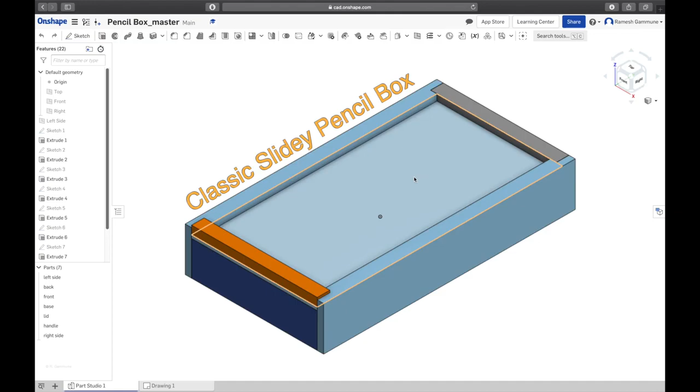It's a bit more advanced than the ones we did before, but it's still fairly simple. You're going to learn two key new functions in this. The first one is how to create an offset plane.

As you can see, that plane's not in the origin. The next one is how to mirror a part. So we've made this once and we mirrored it along the origin. That's the main difference, and they're the two key things you're going to learn in this tutorial.

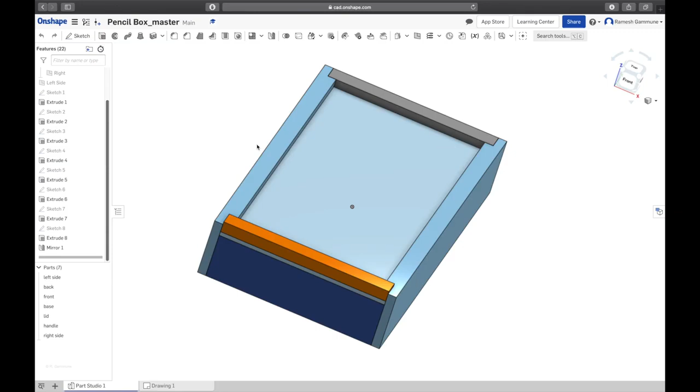Also, you're going to learn how to add new parts, because before we've just been adding features to existing parts. You will also learn how to do a more complex set of drawings.

As you can see here, this is what we are going to end up with. It's actually going to have two pages. Page 1 is a complete pencil box. Then page 2 is a part breakdown.

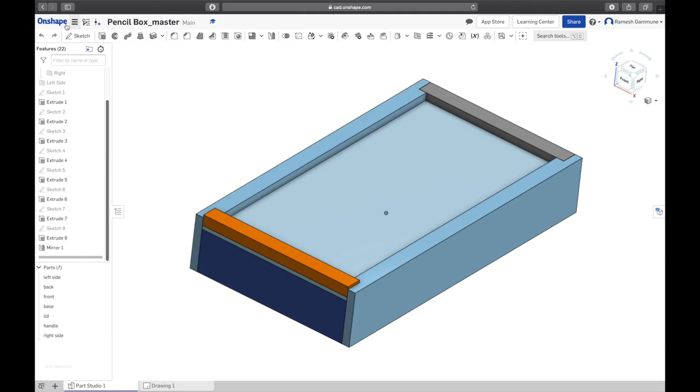Right, so let's get on with it. First thing I'm going to do, go back to my Onshape thing. I'm in a different folder. As you can see, I'm in my Onshape tutorials pencil box folder now. I'm going to go ahead and create a new document. I'm going to title this pencil box.

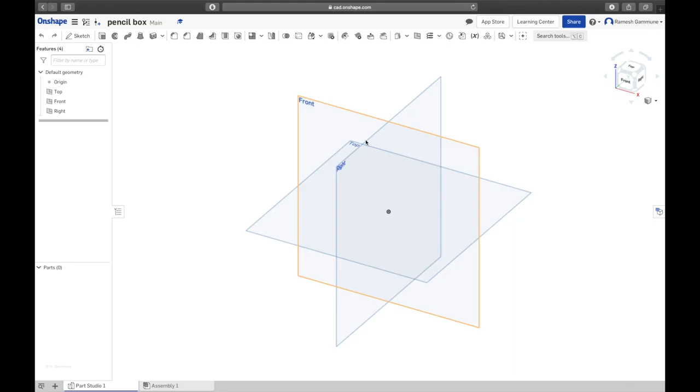Hit OK, give it some time. And we're here. Okay, so the first thing we're going to do is we're going to start by making this left side, just that one. We're only going to make one. At the end, we're going to mirror it.

So if you could just imagine that this pencil box is centered around the origin here. The origin is right in the middle. So we got our top plane that we're looking down on, our front plane, and our right plane.

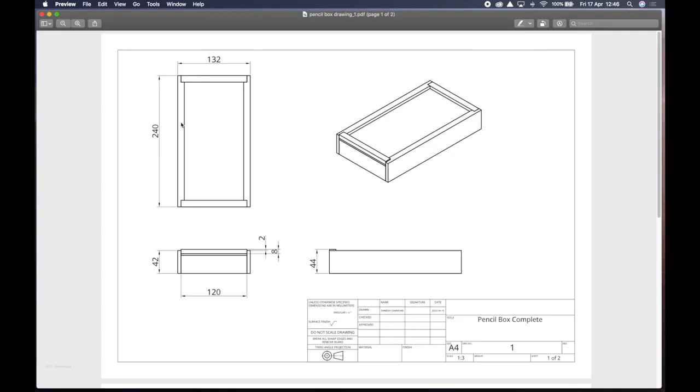So the first thing we have to do is create a new plane offset from the right plane. We spoke about offset sketches, so now we're going to talk about offsetting a plane. Halfway of 132, which is 66 millimeters. So we're going to offset one plane off the right plane by 66 mil and create this part on there. Okay, let's get on with that now.

So for this, I'm not going to need the front plane, I'm going to hide that. I'm not going to need the top plane, I'm going to hide that. I'm only going to need the right plane. And we're going to keep the origin because remember we like to anchor our initial sketches around the origin.

So here's what we do. We're going to go up here to our features buttons, and right here next to that helix, you're going to see a button called plane. So click the plane. And we're going to base this new plane, plane 1, off our right plane.

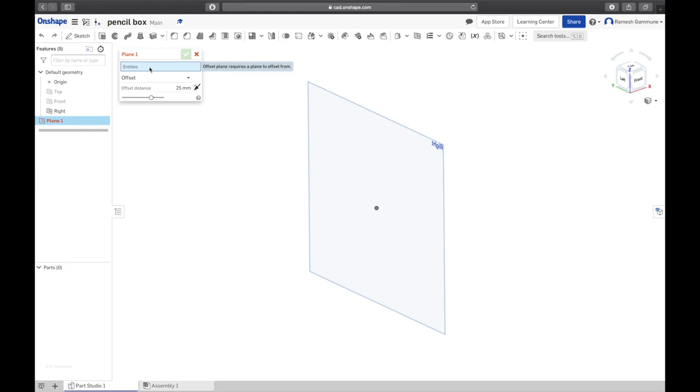Okay, so first thing you have to do is select a plane to offset it off. Now, you can offset planes off faces or planes, but we don't have any faces to do that yet, so we're going to offset it off this right plane. I'm going to click the right plane, and you can see that it is going towards the inside, towards the origin. We want it to go to the left side of the right plane, so we're going to click this button, opposite direction, and we have to type in 66, which is half of 132. 66, enter. There we go.

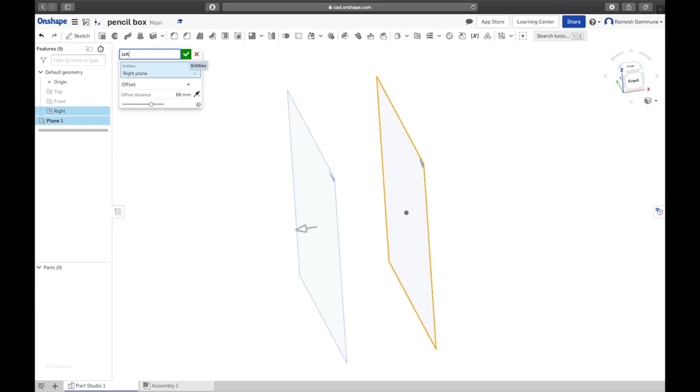And just to get used to good practices, I'm going to change the plane name as well. I'm going to change this to left plane, left offset. There we go, done. Now we don't need the right plane anymore, or for now, so we're going to hide that. So we're going to keep the origin. And we're going to start drawing this side.

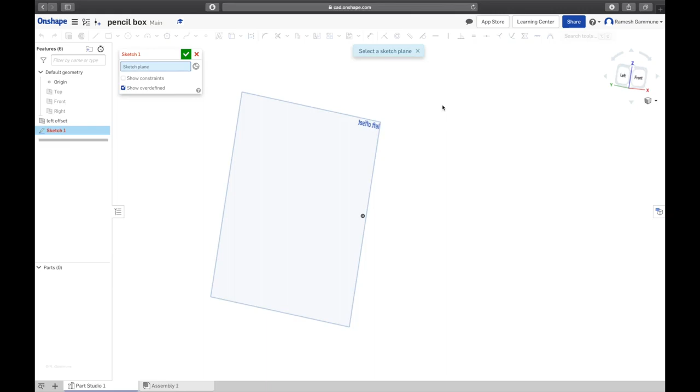And we're going to look at this now, because that gives us what we need to know. So back to Onshape, we're going to open a sketch as usual. I'm going to do this a bit fast now because you've had practice. Select in the sketch plane. Select the new sketch plane, which is our left offset. Right click. View normal to sketch plane.

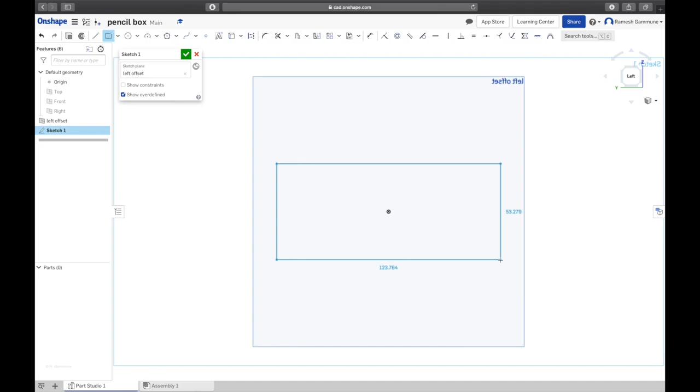Here we go. Going to start off with the center point rectangle. Base it off our center. And just as before, just draw a random one. Hit escape. And we have to dimension it to 240 by 42. So dimension button. Start using shortcuts now. So dimension is D. There we go.

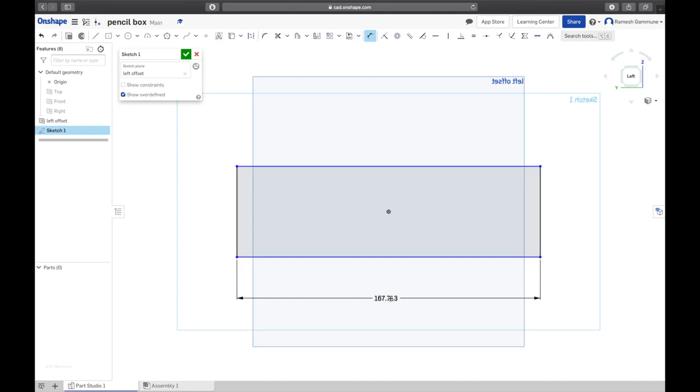Down was 240. Enter. We're still in dimension. Do this up, and that's 42. Enter, right? Just double check, 42, 240, accept it, right?

First step done. Next thing, we got to extrude it at 12 mil. Now remember, we placed that plane to the left side of the right plane, so we have to extrude it towards the origin, right? Not out. If we do that, our box is going to end up being 12 millimeters times 2, because it's going to happen on both sides. It's going to be 24 millimeters wider than we initially intended it to be. So we're going to extrude this towards the origin.

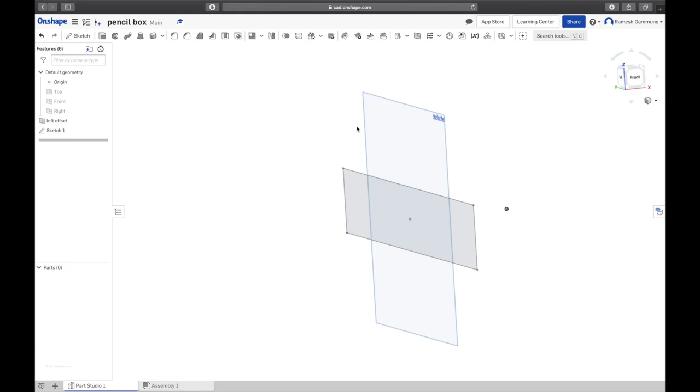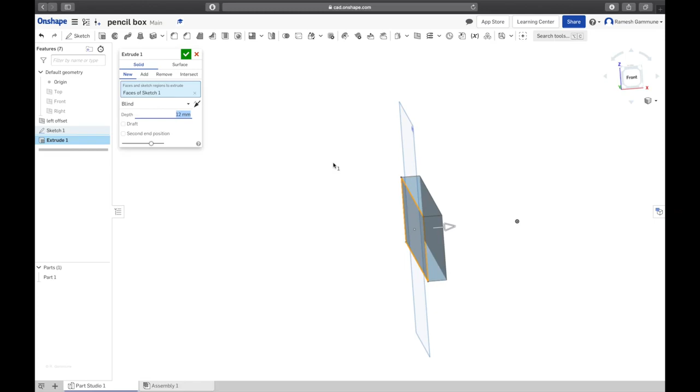Start off by doing that. Right, so back to this. Extrude. Click. Instead of clicking it over here, I'm going to click it from here, just because something different. And you can see automatically it goes towards the origin anyway. And change our depth to 12. Enter. Looks about right. Looks perfect, actually. And accept it.

Cool, that's done. Now, still keep the origin showing, but we can hide the left offset, right? You can actually right-click on that and go to hide left offset plane and do it that way. And as you can see, it's the same function. Done. One step. The next thing we have to do is cut out these grooves.

As you can see, we are going to do these side rebates at the very end. We are going to cut out these long grooves first. So we're going to base it off this side. And you can see it's 6 mil down from the edge, 3 mil wide, because that's the width of the saw blade that we use, and that's the actual thickness of the plywood piece that goes in here for our lid. And the bottom one is 6 mil deep and 3 mil wide, but it's not offset from the bottom. It's just essentially a long rebate. Let's go do that. And here we go.

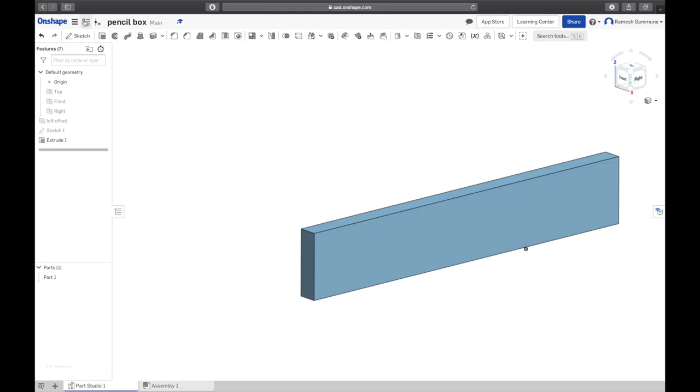Right, back to sketch. Make sure you're doing it the right way. The origin is on the right side of the piece. Sketch plane, we're going to select this. Make sure it's the correct one. Right click, view normal to sketch plane.

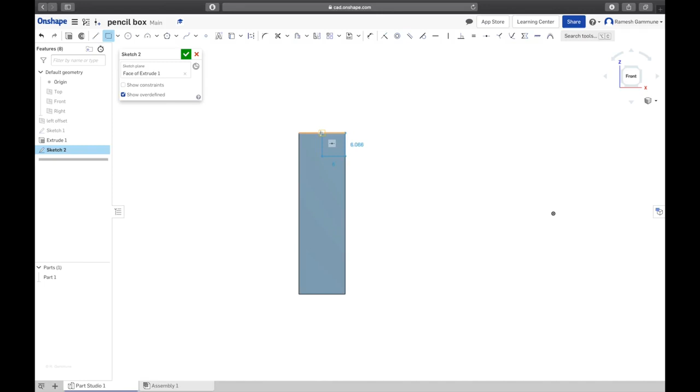Okay, for the top one, we are going to use the normal corner rectangle. Just draw a random rectangle, but make sure that you don't accidentally lock into the midpoint of that top line, right? Yes, ultimately it is going to be 6 mil, and that's half of 12, but I just want you to do it a bit, just to get used to adding correct dimensions as well.

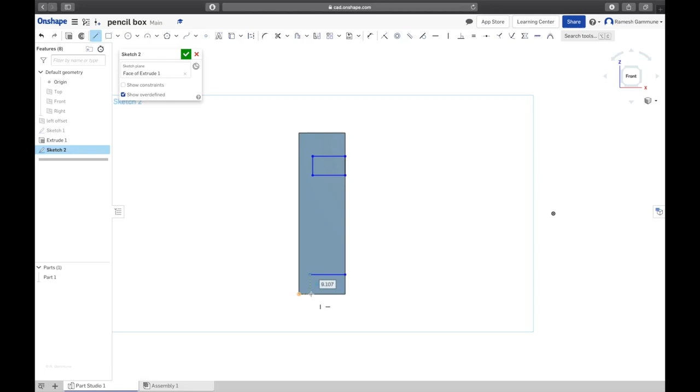Okay, that's done. Escape. The bottom one, we're going to use the line tool, or L, right? Clicked it, same deal, just a random size. And you'd notice that once you click and let go, the tool is still active, just like the rectangle we learned in the last videos. And click over there, hit escape.

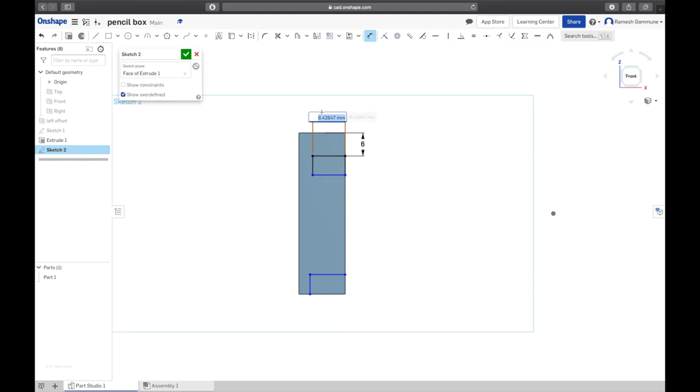Now let's dimension them, right? So back D, top edge to here. We said that was 6 mil. Enter depth, 6 mil. Forgot to hit enter then. Right, so if that happens, just while you're still in the dimension tool, double click that and you can edit it. Enter. All right.

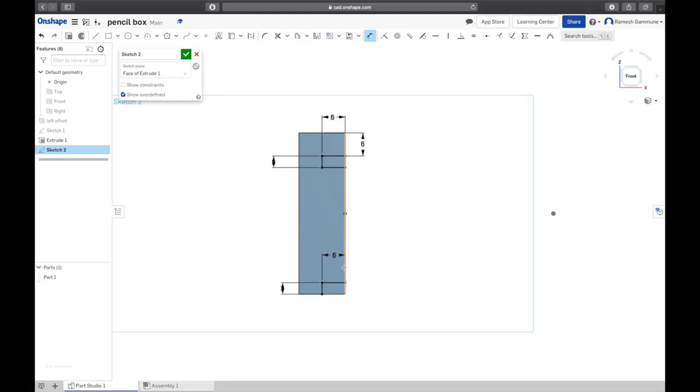Width 3, and that is fully defined. It's completely all black now, nothing's blue. Same thing over here. Our depth is 6 mil, and the width of that is 3. Enter. Right, yes, we could have done this in 2 sketches, but this is a lot faster. We're happy with that. 6, 3, 6, 6, and 3. Double check it with our drawing. 6, 6, 3. Okay.

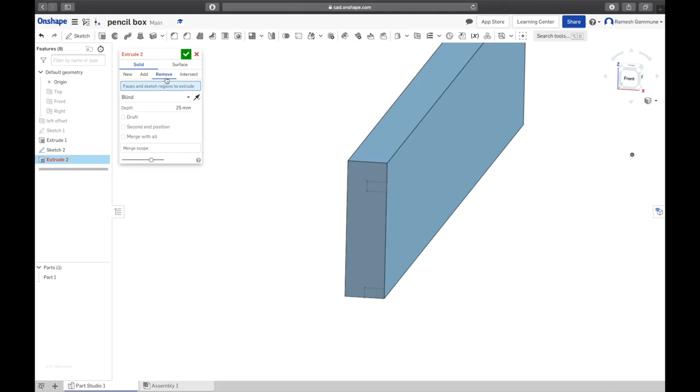And accept the sketch. Now we're going to extrude these 2 sketches. Right, same deal. Extrude, remove. Here's where it gets a bit tricky when you pick things, right? You could accidentally, if you pick the outside, it's going to remove that and leave the sketches there. Right, what we want is to pick these parts. If you accidentally pick the wrong thing, you can go back to this window over here.

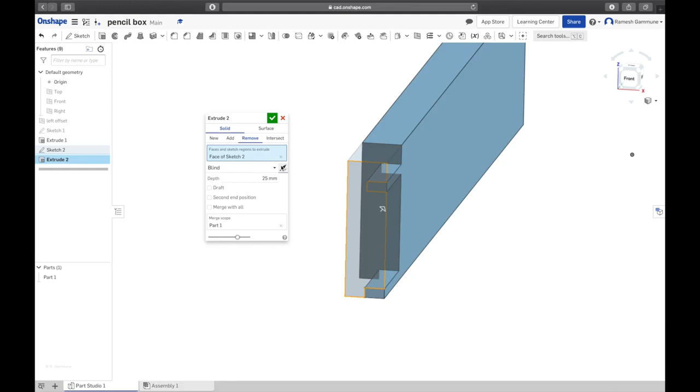As you can see, I'm just going to move it there and just get rid of them. Pick that and pick that. And we want it to go through all. Hit and done. Right. Next thing are these 2 rebates.

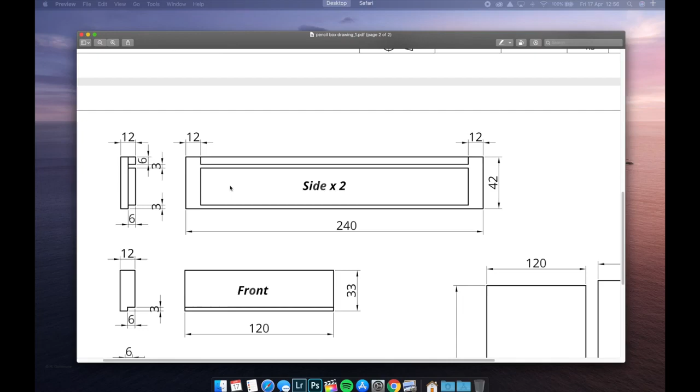We're going to sketch that on this face. So this face over here, that line. We're going to do one and mirror it along the center, and that way you only do one sketch. I'll show you how to do that. Back to sketch, select the sketch plane, make sure it's the correct one, right click, view normal to sketch plane. I'm going to move that out of the way.

Okay, first thing we want to do is draw a construction line along the origin. So just draw a normal line first, doesn't matter which direction it goes as long as it is vertical. You'll see that little vertical line next to my cursor. So it's vertical, it'll snap there, there we go. Right, hit escape, click that construction line because we don't want it to register in our extrusions. Click the construction line now and then click anywhere on the thing to get rid of it.

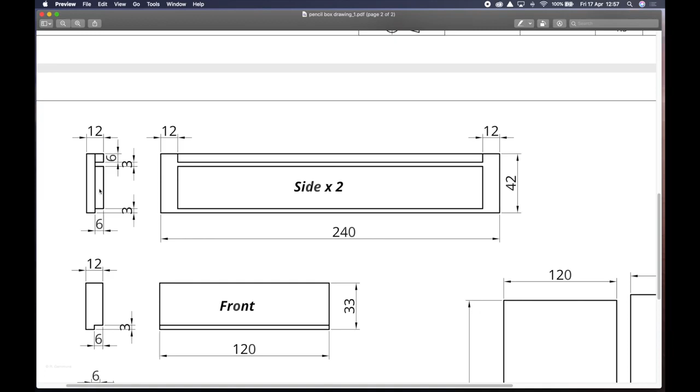There we go, one. The two rebates on either side are 12 mil wide and 6 mil deep, as you can see here. Right, so every cut is 6 millimeters deep in this pencil box. Let's get back. Corner rectangle, anchor it to the corner, and you'll notice that it doesn't anchor on this bottom line here. That's because it is not on the plane that we're sketching on. So don't leave it here, even though it will work because it's already down to 6 mil. But let's do this properly.

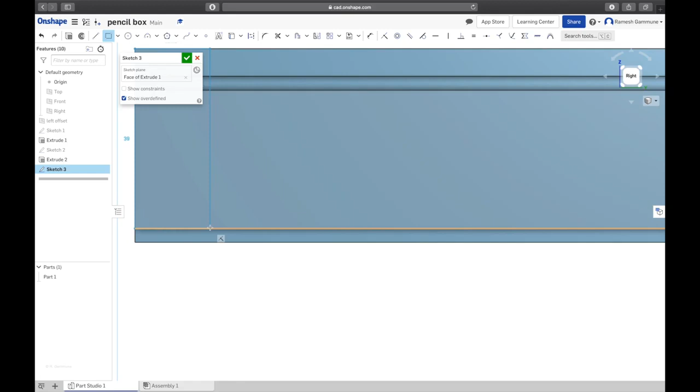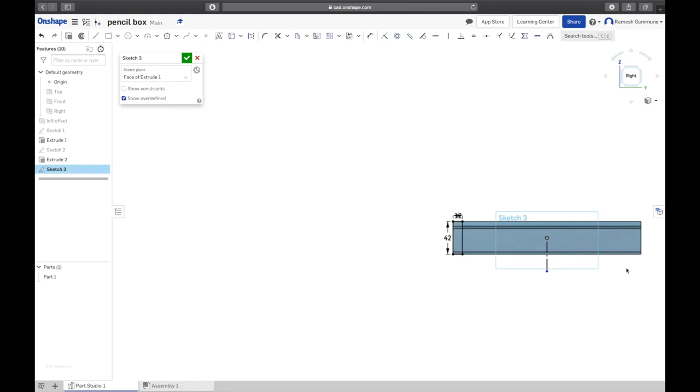Make it a bit bigger. Zoom out. D for dimension. 12. Enter. That entire line is 42 because that's the height of our part. Right. And escape to get out of dimension. Now, as you can see, just get in screen. There we go. Remember, just hit F if it's not doing what you wanted to do. All right, as you can see, we've got one here.

We can easily just click another corner rectangle and draw it over here. But I'm going to show you how to use the sketch mirror function. So this tool over here, next to the offset function, mirror, click that. It says the first thing you do is select a mirror line. We've drawn that line. It is smack bang in the middle. Click it. And then select entities to be mirrored. So now everything you click or select will be mirrored along this.

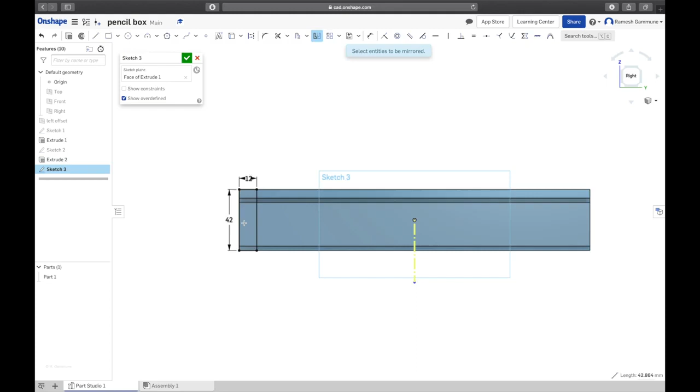Right, so I want this line. You can see, there it is. Okay, top and bottom. There we go. And that one. Right. Perfectly mirrored. Hit escape to get out of that function, because if you're still in here and you start clicking elsewhere, it's just going to keep mirroring those. We don't have anything to do so, but, you know, just do it. And escape. Happy with that.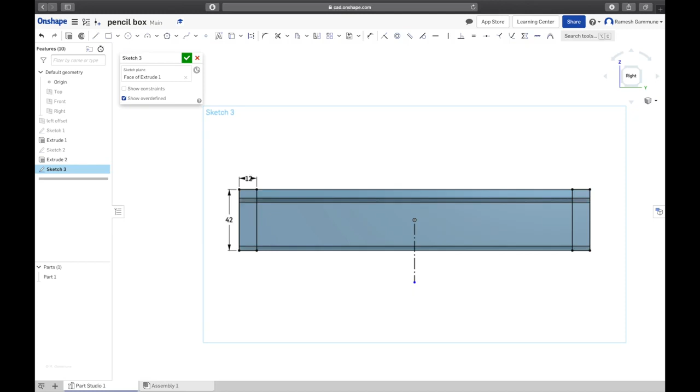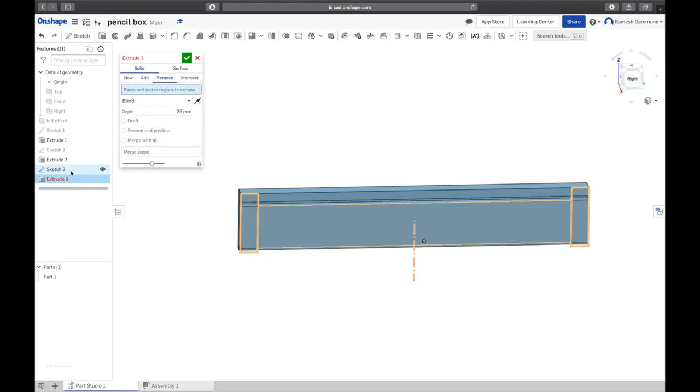Done. And we have to extrude cut these now. So remove. It's going to be tricky to pick all of these, but because we drew closed sketches, we can just select sketch 3 and it will remove it for us. So we want it to go that direction, but we want to only go down 6 mil. Right, there we go. And click. Done. Okay, that's our left side done.

Because we're going to have a lot of parts and we want to know which parts are which, it's good practice this time to name the actual part. So if I click this, you'll notice that that part is all highlighted. And I can hide or show the part. So it says part 1 now. I'm going to name this left side. So right click, rename, just type in left side and enter.

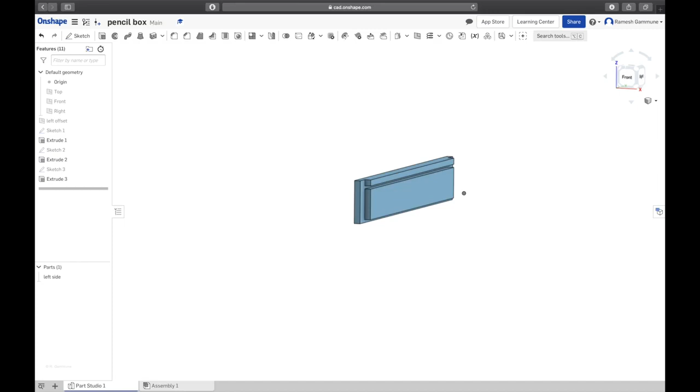Okay, we'll do the rest in the next video, because the next few functions are quite straightforward and easy. They're just straight extrusions. There's not a lot of cutting and stuff to do.